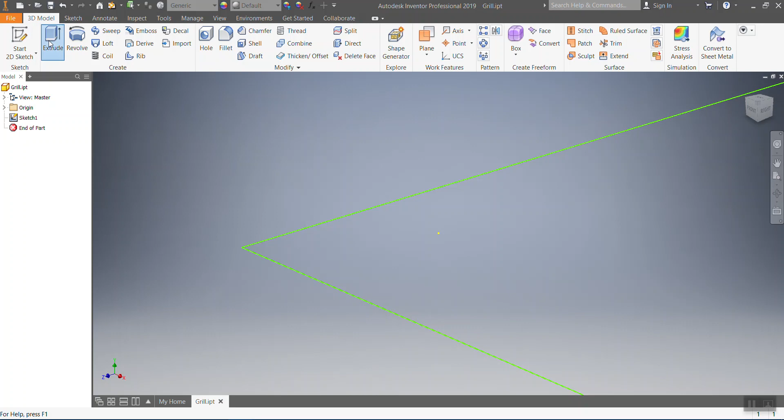Let's start a new sketch on this work plane. Sketch tab, rectangle. I'm going to make it 95 down by 175. And then we're going to finish the sketch, and then extrude 3mm, just here.

And then we're going to start a new sketch again on here and draw a center line. That green dot across. There we go. And then we're going to come in 45. We've worked it out.

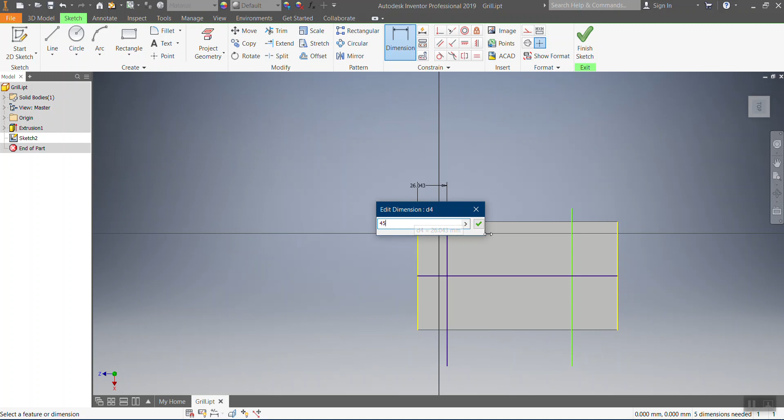To do that, use the dimension tab here. Click on that line, drag it up, click again and hit 45. Do the same. Click, click and drag, click again, 45, enter.

Then we're going to finish that sketch, make a new sketch, and this is where we're going to start the pattern. Go circle, and snap to this. Now if it doesn't snap, you could try project geometry. Select that line, that line, that line. Maybe select the whole thing as well, and then go circle, and it should snap. As you can see, it does.

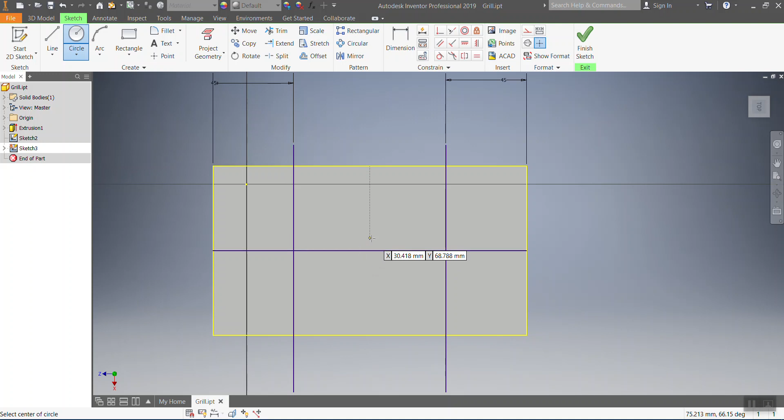So let's center it. I'm just zooming out, in and out with my mouse wheel. Alright, so I'm going to snap to there, and I'm going to make that 10. And I'll come over here and make that 10 as well.

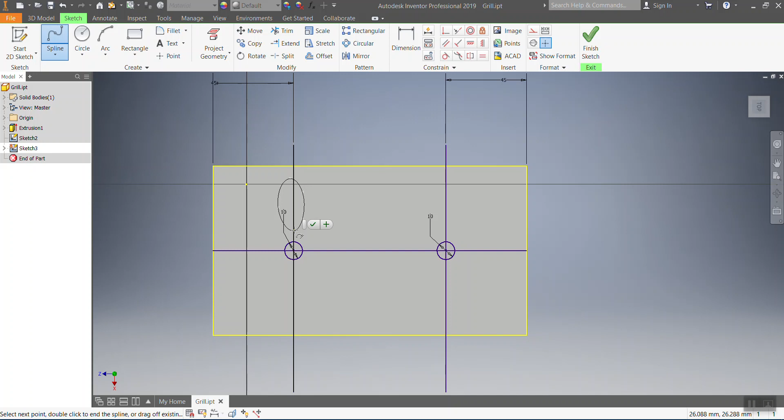Now what we're going to do is make a little pattern here for the grill, and I'm going to copy it around like a flower, some sort of a pattern. You don't have to do a petal, it could be any shape, but let's try with the line and then spline. I'm just going to do something fairly simple. And double click and press escape to get out of that.

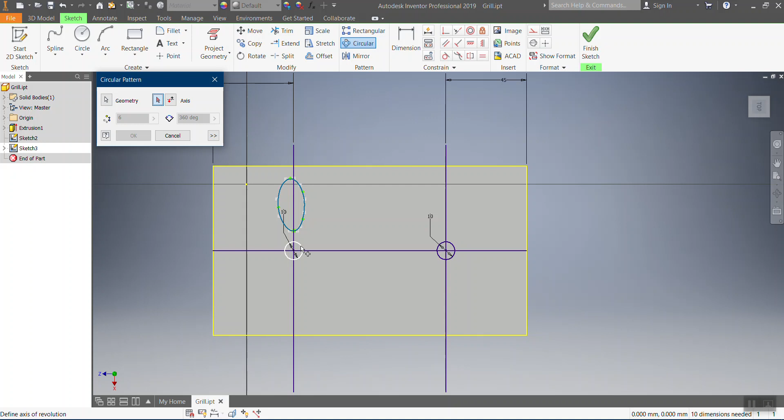Now I'm going to select that and come up here to pattern and go circular. That's the geometry, so geometry is selected. We're now going to select axis and choose the center point. You could probably choose either this circle or this center point. And then 6 patterns turn up because it's got 6 here. If you type in 7, you get more, so don't do too many because they could start to encroach on each other. So take it back a little bit and press OK.

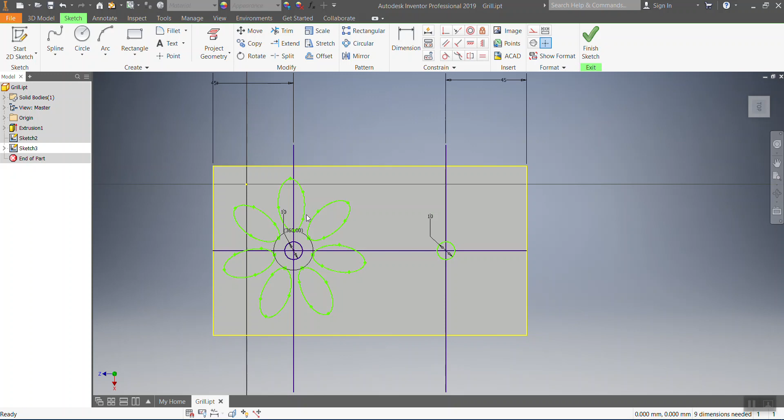Another thing you can do is select this, the original, and they all change. So I can actually, you don't want to be able to put your finger through to the speaker, so something like that, but you do still want to allow some air to get through. So when you're finished, press finish, but what we could do is select that and then mirror on this line here.

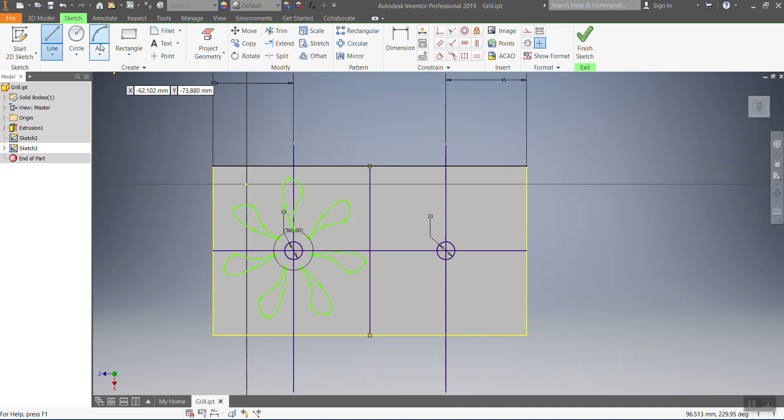And we don't have a line there, so let's make one. Let's make a line in the middle. See, there's a green dot there to that green dot, and there's our center line that we're going to mirror this. So I'm going to press escape. That's selected. Mirror. Choose that line. Like that. And go apply. Finish the sketch. And there we have our pattern.

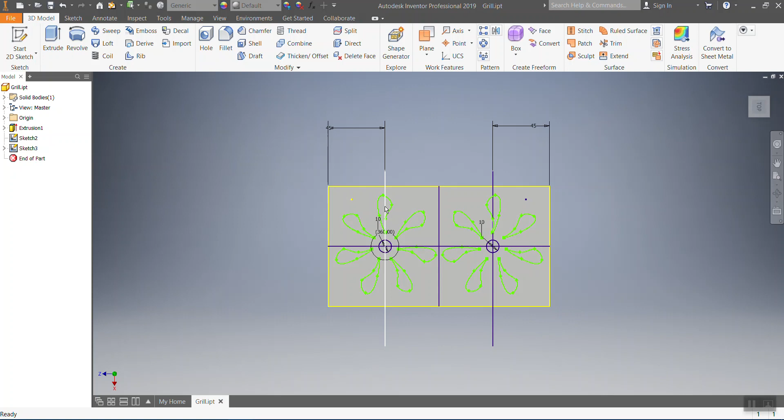I want to look straight on to that surface. I can click on this top of the cube, and what we can do now is cut through each one of these. To do that, press extrude and go into the middle of each of these. If you can't quite see it, just move. I can do this with pushing my mouse wheel in with the shift key.

Just be really careful, click in the middle and in the middle here. Okay, now that didn't work, and I think that's because these lines are getting in the way. So what I can do now, I can go back to Sketch 2, right click on it and delete. Do I want to delete the dependent sketches? No, it's okay. Alright, let's try it again.

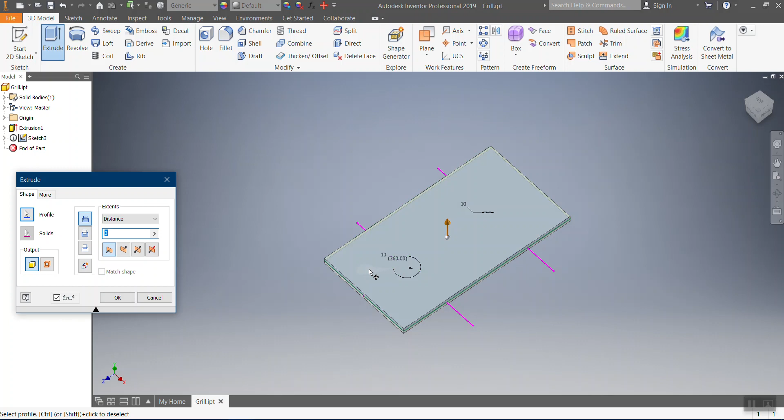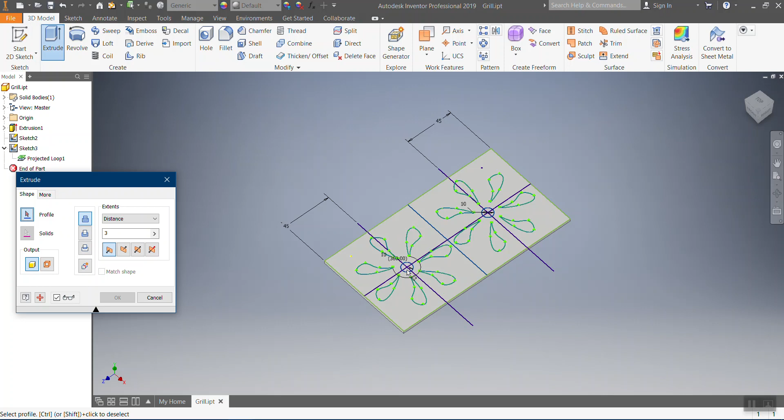Extrude. Alright, it's not working. Okay. I've got to finish. Let's try again. That worked. And then each of these.

So I'm not sure why that didn't work. Each of those, zoom out, choose the next one. So it might help if we zoom in. There, that works a lot better. And choose each one of these.

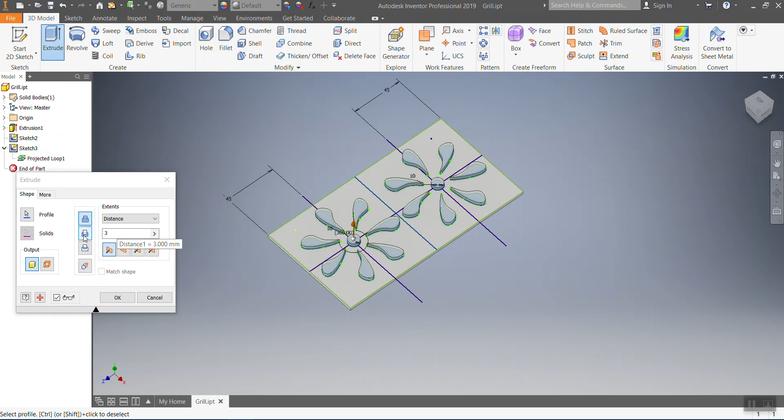And 3 mil, and we're going to cut instead of join. There we go, cut, and it cuts it through. Press OK, and it's done. One thing we haven't got is the screw holes, which are in the corner.

So let's do that. New sketch. Okay, so where I'm going to put this, I'm going to put some guidelines from here to here. Make sure they're horizontal and vertical. There we go.

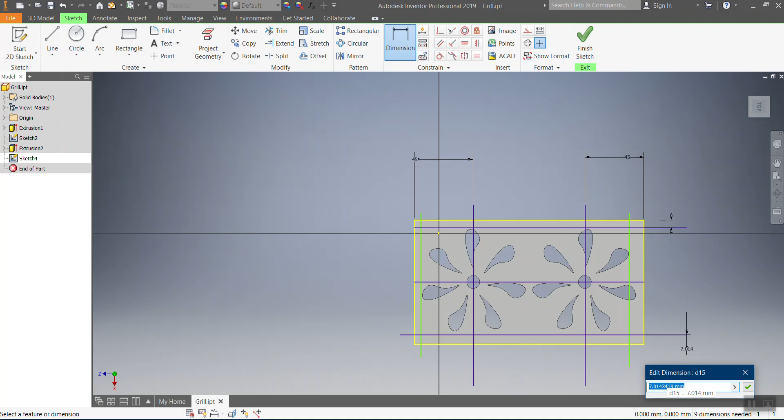And then I'm just going to use the dimension tool. So click on that and drag, and I'm going to go 6 mil. And do the same here. Click, click and drag, and type in 6 and enter. This one is going to be 10 mil in. 10, enter. Click on this, click on that, drag it up, click again and hit 10.

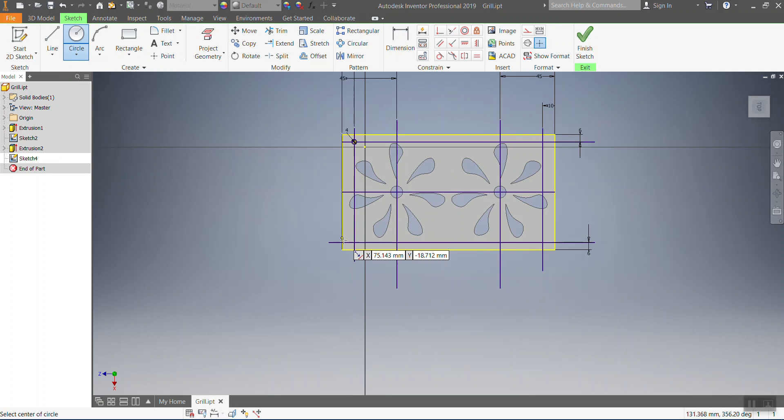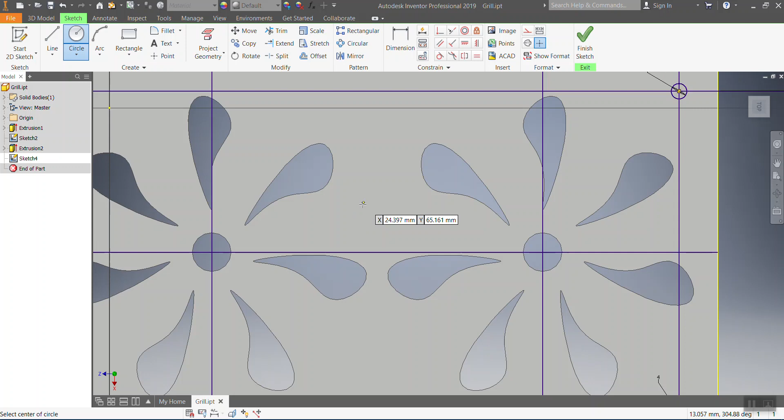Alright, so that's where that intersection is, where the circle is going to be for the cutout for the screws. So I'm going to choose circle, and I'm going to zoom in, and we're going to make a 4 mil hole, and zoom in again, 4 mil, enter. 4, enter. Zoom out and then zoom back in. 4, enter. And just zoom in and out with your mouse wheel. Click finish.

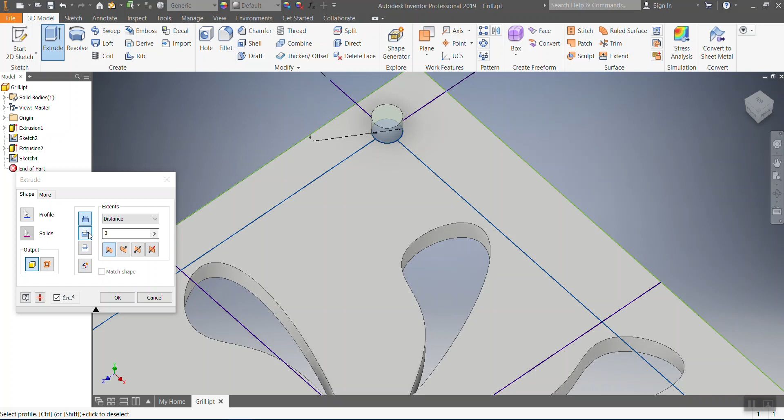Now we're going to extrude. Come in here, select carefully, select again, select, and again, and then hit cut. It's already 3 mil. Press OK. That's done it. One more thing, we're going to countersink these holes.

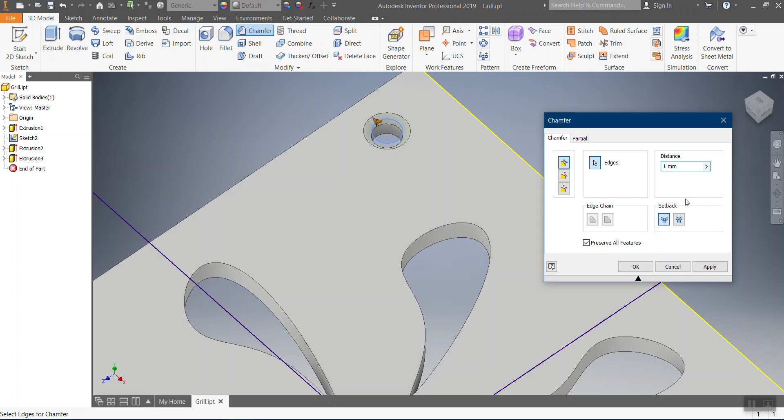So we come up to modify, and we're going to hit chamfer and a 2 mil. Let's have a look at see if 2 mil works. Let's try 1 mil. Yeah, 1 mil. 1 mil's better. Don't press OK yet because we're going to choose all of them.

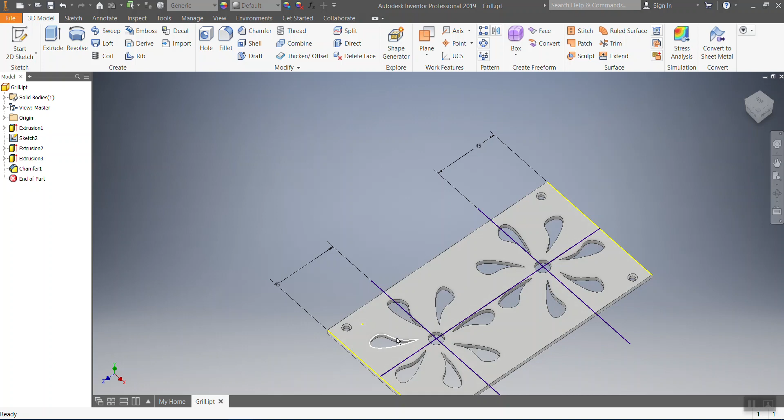Alright, they're all chosen now, or selected. Now we can press apply, cancel that, and done. Alright, hit the top. There is our grill, finished.